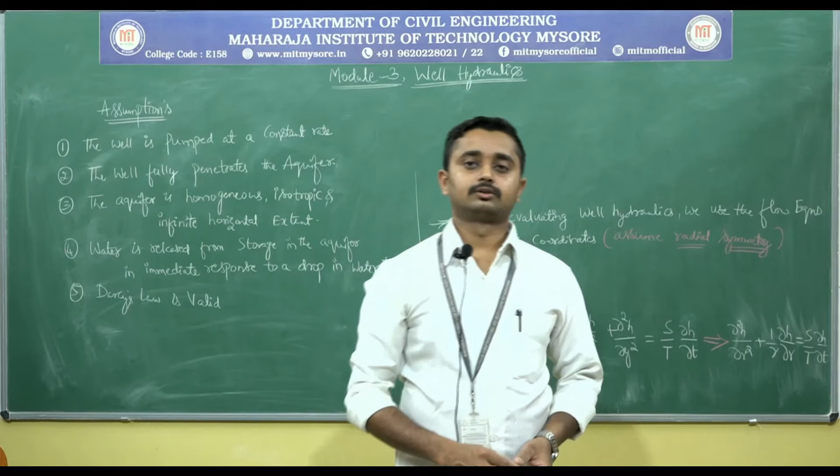Hello. Today we will start module 3, well hydraulics. Basically, well hydraulics means the study of water flowing towards the well.

If this is a well, when the pumping starts, consider this is the initial water level.

When the pumping starts, this water level reduces to this point. Also, the water level in the aquifer, meaning the water level in the vicinity of the well, both get reduced. The reduced water level forms drawdown.

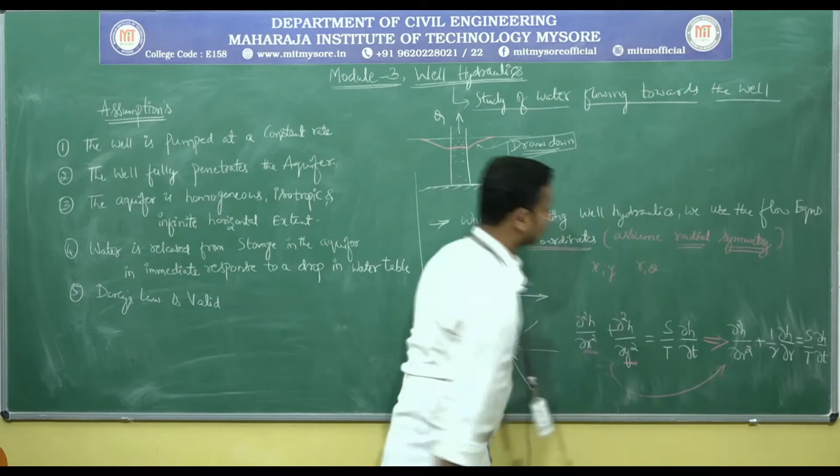Dou square h by dou x square in the x direction, dou square h by dou y square in the y direction, equals s by t, dou h by dou t. I'll explain these equations in the coming derivations. This gets converted into r, the radial direction. Simply, well hydraulics is the study of water flowing towards the well. This is all about well hydraulics.

There are some assumptions before entering into this module. This module has too many derivations, but I'll explain everything in detail, don't worry about it.

Assumption one: the well is pumped at a constant rate, not with variations. Next, the well fully penetrates the aquifer. If this is the impervious layer, the well fully penetrates, not just up to here or here.

Next, the aquifer is homogeneous, isotropic, and of infinite horizontal extent. Homogeneous and isotropic means the property here is same, the property of the soil or property of the water is same everywhere. Everything is homogeneous.

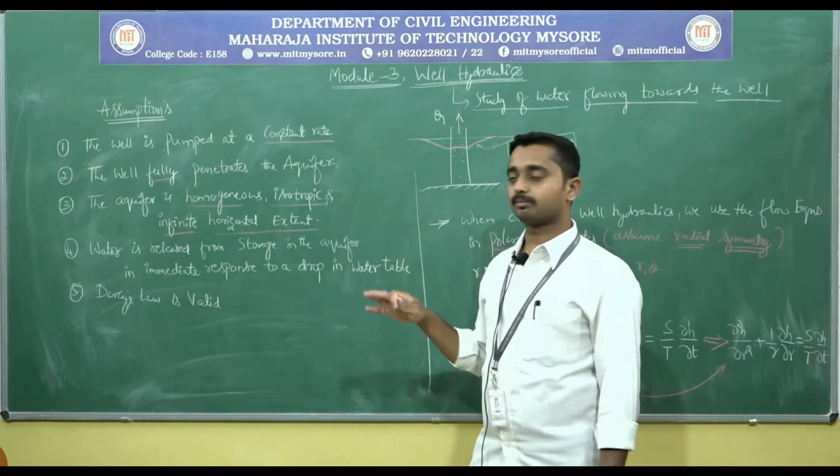Infinite horizontal area means we are not restricting to some kilometer square area, this is infinite area. So the aquifer is homogeneous, isotropic, and of infinite horizontal extent, with no restriction, and the property of water and soil is the same throughout this infinite area.

Next, water is released from storage in the aquifer with immediate response to the drop. If you start pumping, water level immediately decreases. If there is good rain or flow from another aquifer, the water level immediately rises. Once you start pumping, water level definitely immediately reduces.

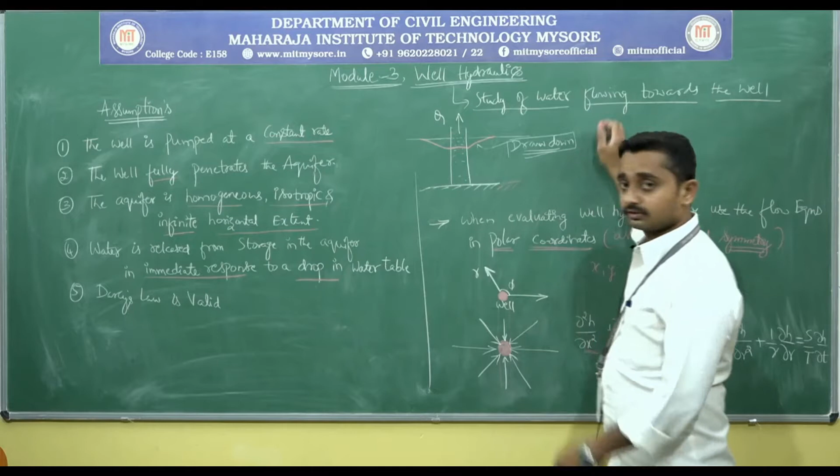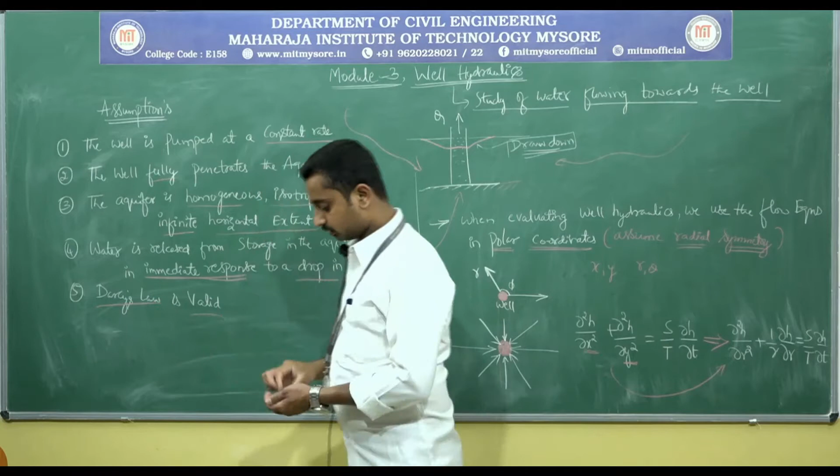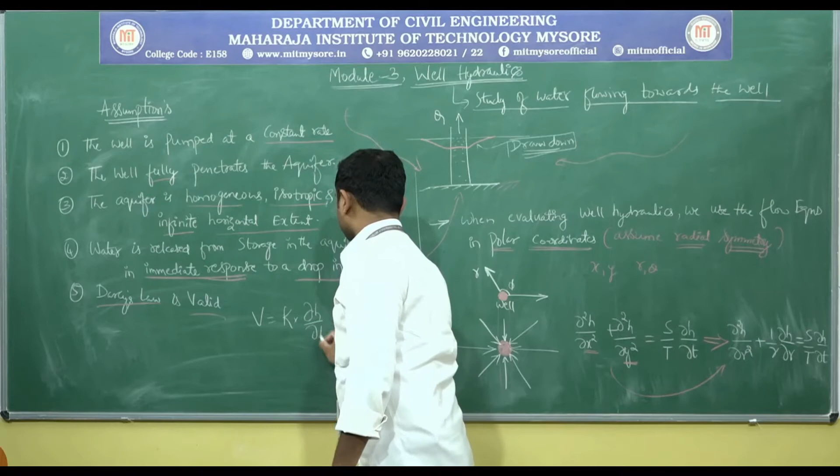If there is a good rain or a flow from another aquifer, the aquifer gets recharged and the water level rises. This is an immediate response to a drop in water table. Next, Darcy's law is valid, which you know from module 2: velocity V equals K, the permeability, into dH by dT. So Darcy's law is valid.

These are all assumptions we must keep in mind throughout this module, since this module is mainly about derivations, and in every derivation we need all these things.

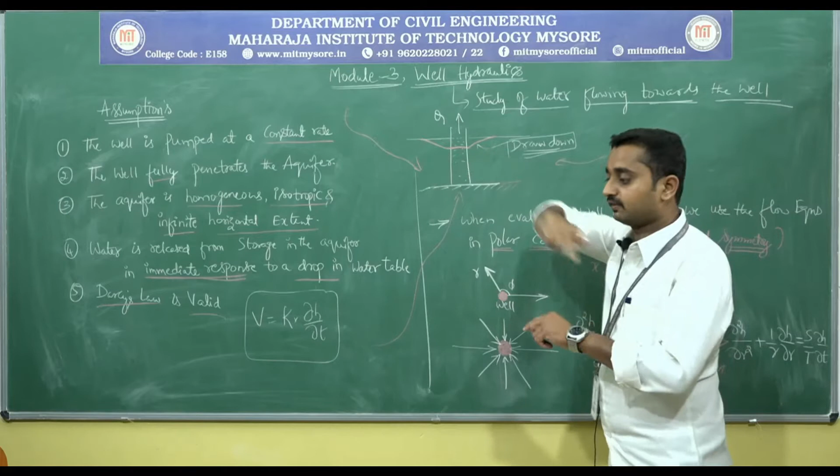Once the pumping starts, water level gets reduced, both in the well and in the vicinity surrounding the well. This reduced water level forms the cone of depression, which is nothing but drawdown.

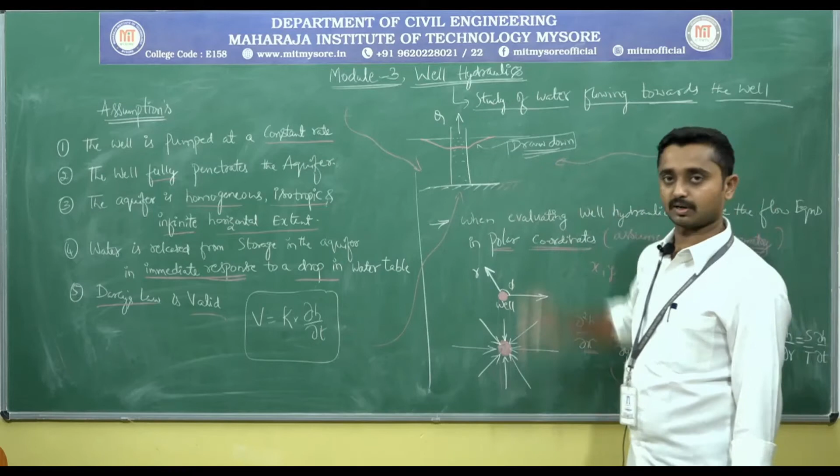In case of well hydraulics, we prefer polar coordinates because water level varies in all directions, not only in X or Y. Once you start pumping, water level varies in all directions, and once the aquifer recharges, it recharges in all directions.

This is all about the introduction part of well hydraulics.

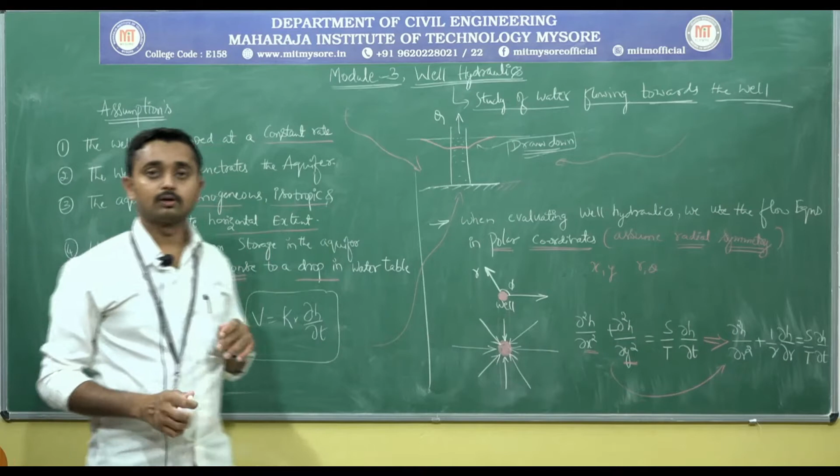Today we will derive Thiem's equation, also known as Dupuit's equation. I'll explain everything one by one. So, steady radial flow to a well in an unconfined aquifer is called Thiem's equation, and when there is no observation well, the same equation is called Dupuit's equation. I'll cover these points in this part.

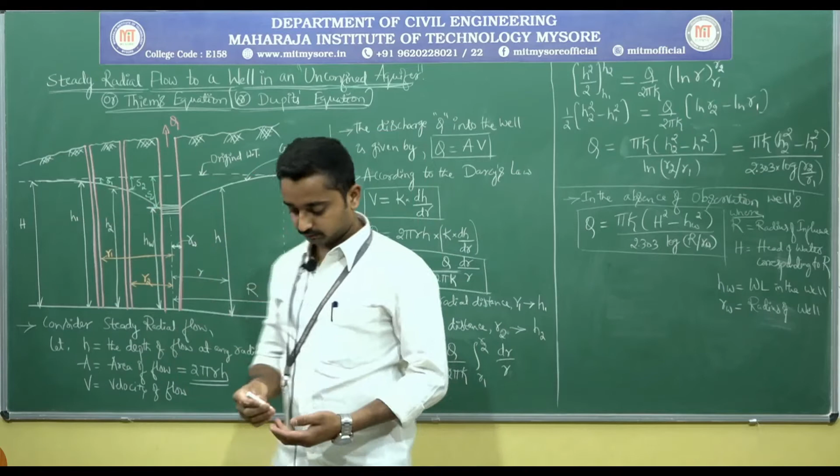Carefully observe the diagram. This is the pumping well, and these two are observation wells: observation well 1 and observation well 2. Through the pumping well we extract water, while the observation wells continuously record the data.

This is the original water table. Once pumping starts, the original water level slowly decreases, forming the cone of depression, the area of influence. Around the pumping well, within some area, the water level slowly decreases, and this is called the cone of depression.

This cone of depression shows a reduced water level: this is drawdown SW at the pumping well, S1 is the drawdown at observation well 1, and similarly drawdown at observation well 2. Drawdown is nothing but the decreased water level. This is the height from the impermeable strata to the water level, H1 for observation well 1 and H2 for observation well 2, and H is the whole head of water.

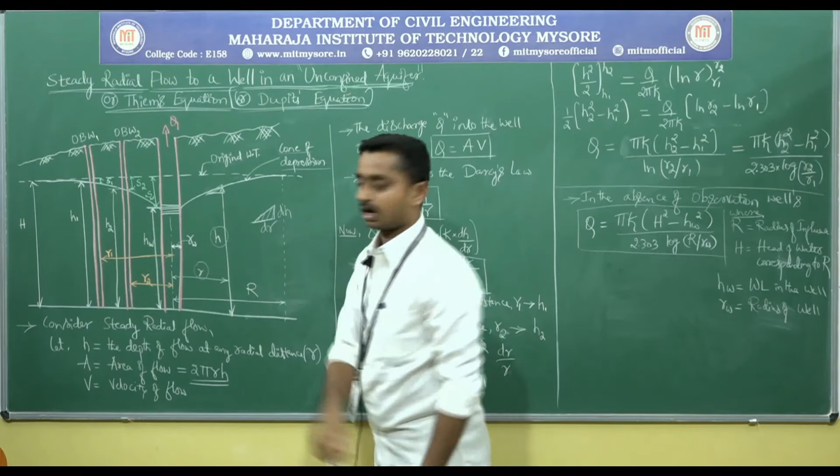H is the depth of flow at any radial distance R. A means area of flow, 2 pi RH for this pumping well, and V is velocity of the flow.

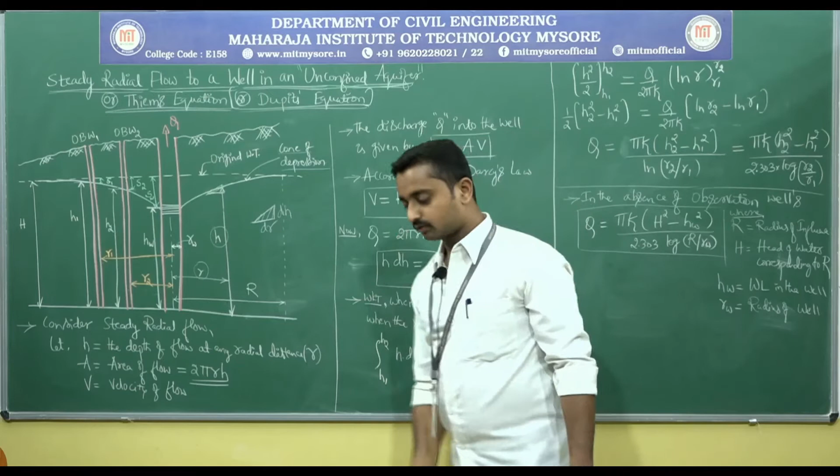Now the discharge, a very well known formula from third semester fluid mechanics. The discharge Q into the well is given by Q equals AV, the continuity equation.

According to Darcy's law, which we already know from module 1 and 2, please revise the previous concepts. Darcy's law says velocity V equals K into dH by dr, the coefficient into hydraulic gradient.

Now substitute the values into this equation. Q equals area, which is 2 pi RH, multiplied by velocity K into dH by dr. Rearranging, H into dH equals Q divided by 2 pi K, multiplied by dr by R.

When the radial distance is R1, the depth of flow is H1. See carefully in the diagram, when the radial distance is R1, the depth is H1. These are the boundary conditions.

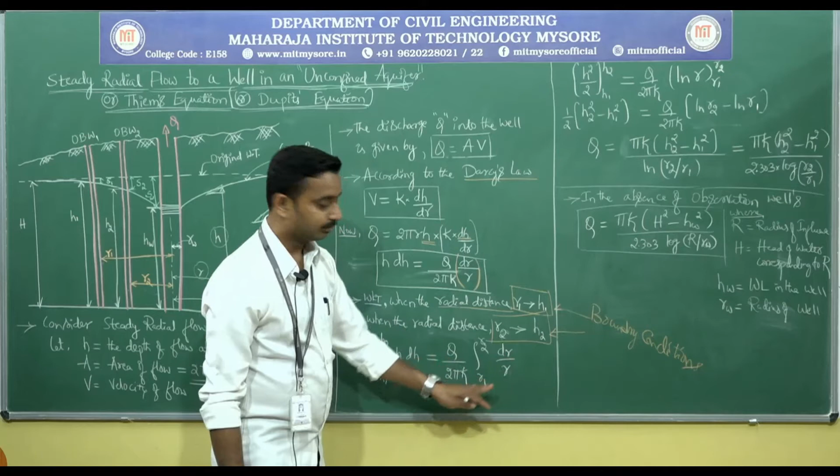Now integrate this equation: integration of h dh between the limits h1 to h2 equals Q by 2 pi K, taken outside, times the integration of dr by r between the limits r1 to r2. Integration of h into dh gives h square by 2, between the limits h1 to h2, equals Q by 2 pi K into integration of 1 by r.

Integration of 1 by r gives ln r between the limits r1 to r2. Substituting the limits: 1 by 2 taken outside, h square, so h2 square upper limit minus h1 square lower limit equals Q divided by 2 pi K into ln r2 upper limit minus ln r1.

Here the 2 gets cancelled. Forming the equation for Q: Q equals h2 square minus h1 square into pi K, divided by ln r2 minus ln r1, which in log a minus log b form becomes ln r2 by r1.

Now convert the ln to log. Pi K remains the same, h2 square minus h1 square remains the same, so ln converted into log gives multiplied by 2.303, log of r2 by r1. This is the equation for radial flow in an unconfined aquifer.

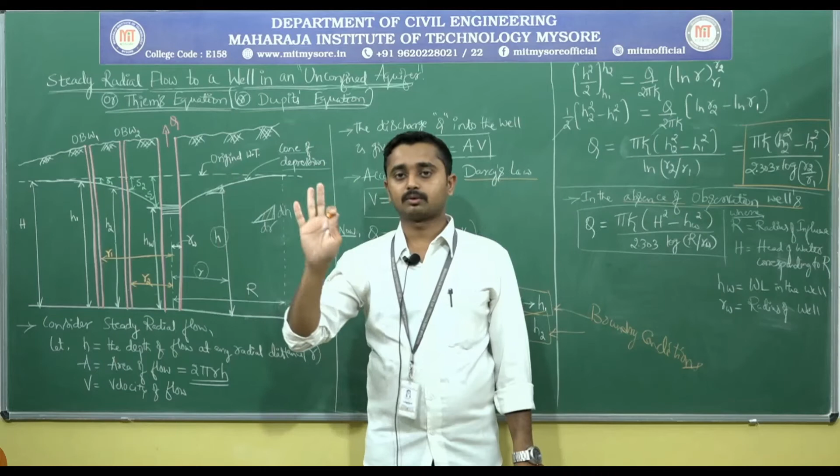Steady radial flow in an unconfined aquifer - this is the equation. If there is no observation well, just change the terminology. With only a pumping well, Q equals pi K, where h2 is replaced by H, the total head of water, and h1 is replaced by hw. This is the equation for steady radial flow in an unconfined aquifer when there is no observation well.

If there is no observation well, replace h2 by capital H and h1 by hw. Everything else stays the same, divided by 2.303 log of r2, the radius of influence, which is replaced by capital R, up to the cone of depression, divided by r1, which is replaced by rw, the radius of the pumping well. This equation is known as Dupuit's equation.

If there is an observation well, then this is Thiem's equation for steady radial flow in an unconfined aquifer. If there is no observation well, then this equation is called Dupuit's equation. R is the radius of influence, from the center of the pumping well to the end of the cone of depression.

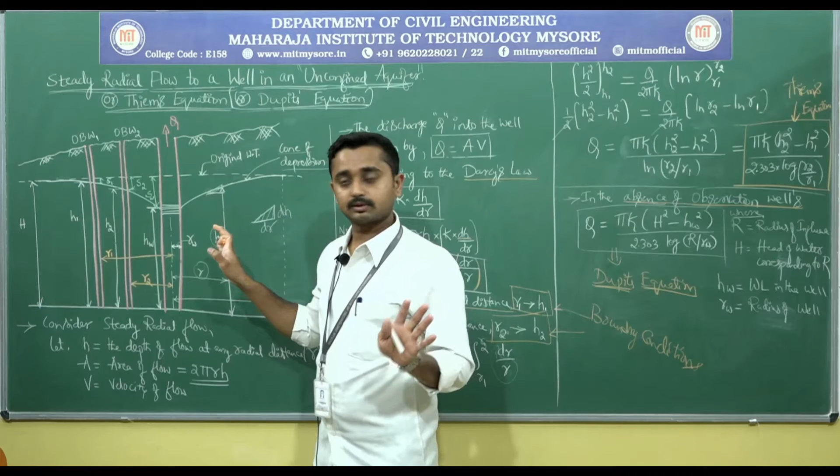H is the head of water, the full head of water. HW is the water level in the well - remember there is no observation well in this case, so HW means water level in the pumping well. RW is the radius of the well, the pumping well. This is all about steady radial flow to a well in an unconfined aquifer.

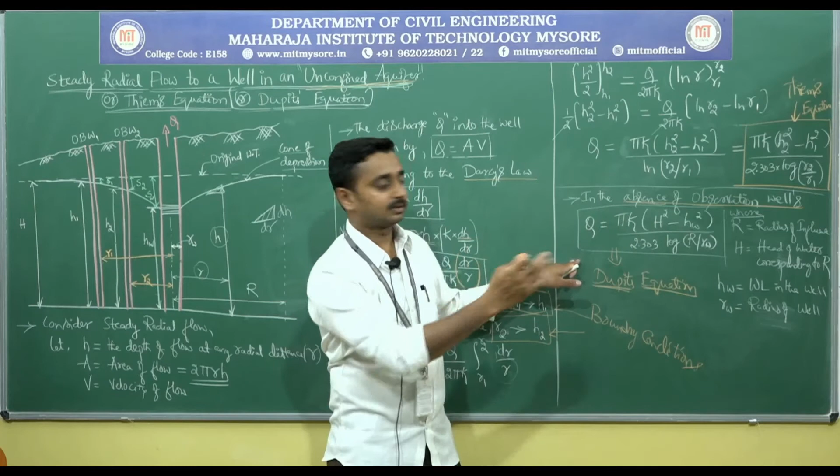This is important - for an unconfined aquifer, this is sometimes also called Thiem's equation. If there is no observation well, the same equation is replaced with different terminology, and then we call it Dupit's equation.

Next derivation: steady radial flow to a well in a confined aquifer. The previous one was steady radial flow to a well in an unconfined aquifer. Now we follow the same procedure for a confined aquifer. The previous diagram also looks like this.

Carefully observe, in case of a confined aquifer, as the name suggests, this is confined. There are two impervious layers, so this water is confined between two impervious layers. In the previous derivation, there was only one impervious layer because that was unconfined and the water level was open to atmosphere. But here the water level is confined between impervious layers. And the thickness between the two impervious layers is B.

Same setup: this is the pumping well, observation well 1 and 2, very similar to the previous one. Height of water, head of water in observation well 1 is H1, head of water in observation well 2 is H2. The radial distance from the center of the pumping well to observation well 1 is R1, and to observation well 2 is R2. Head of water in the pumping well is HW.

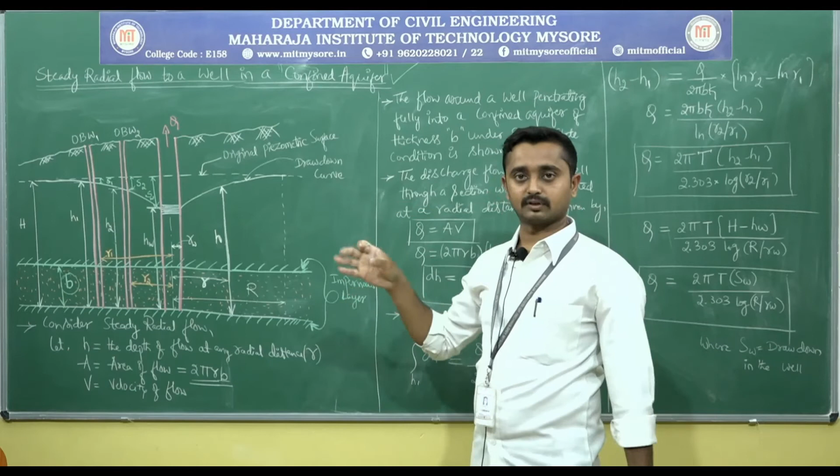Except for these two points, confinement between two impervious layers, everything else is similar to the previous derivation. In the previous derivation, the area of flow was 2 pi r h, but here it is 2 pi r b, because the thickness between the impervious layers is B. And we have the radius of influence R, radial distance R at corresponding head H.

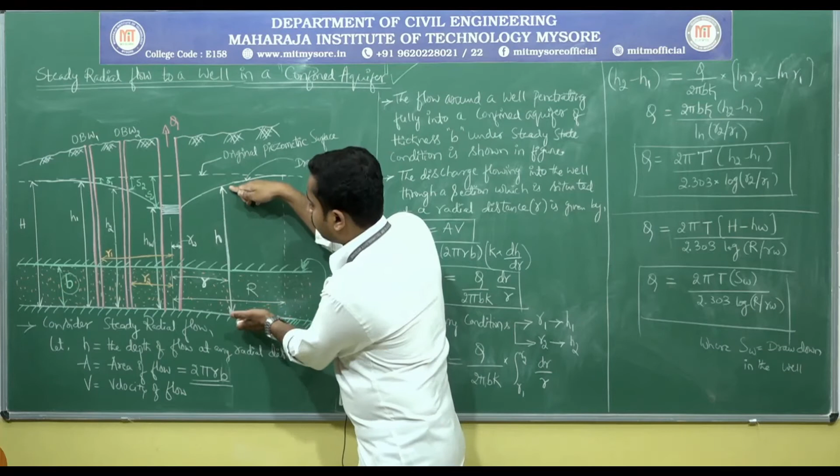Now consider the steady radial flow, very similar to the last derivation. H means the depth of flow at any radial distance R.

Area of the flow is 2 pi R B within this area, since the thickness between the impervious layers is B. V is the velocity of the flow. Very similar setup, only the area is different: in the previous derivation it was 2 pi R H, now it is 2 pi R B.

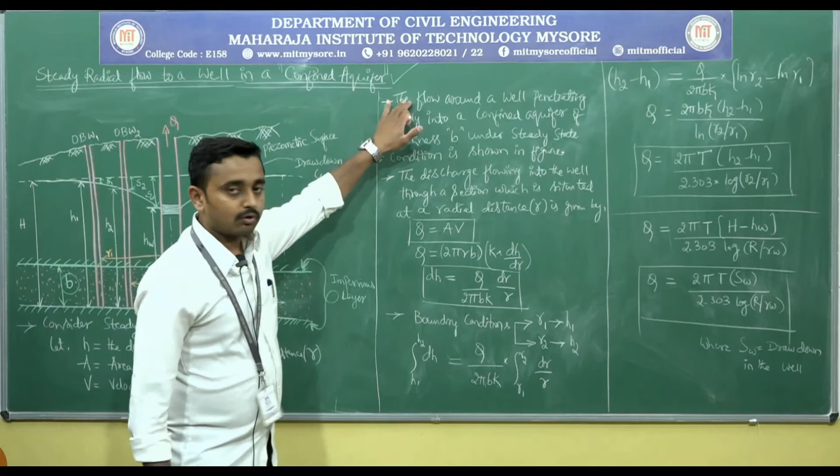The flow around a well penetrating fully into the confined aquifer. Here the flow is around a well penetrating fully into the confined aquifer of thickness B. This thickness is B.

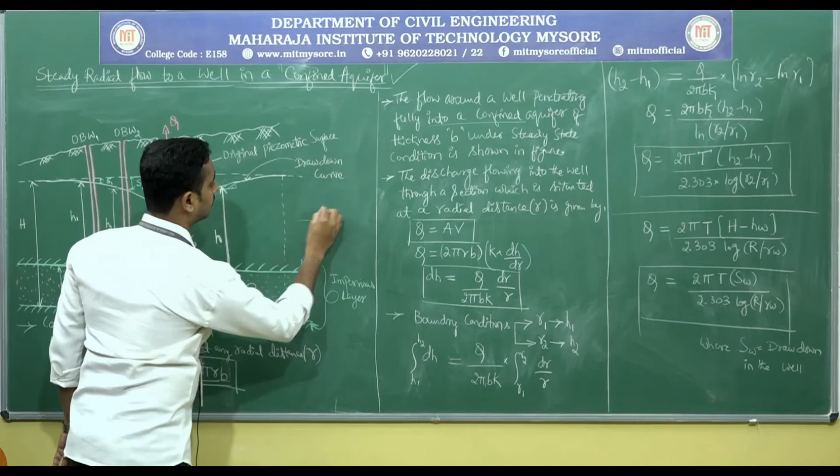Under steady state flow, as shown in the figure, now consider the discharge flowing into the well through a small section. Consider a small section of radial distance dr and height dh. This discharge flows into the well through a section situated at a radial distance r.

This is given by Q equals A V. We know A is 2 pi R B, and velocity according to Darcy's law is K into dH by dr. Now substitute the values: area 2 pi R B into velocity, which follows Darcy's equation, very similar to the previous one, K into dH by dr.

Now rearrange the terms: dH equals Q divided by 2 pi b k, into dr by r. Just rearranging the terms.

We know the boundary conditions: at a radial distance r1, the depth of flow is h1. Similarly, for the second boundary condition, at radial distance r2, the depth of flow is h2.

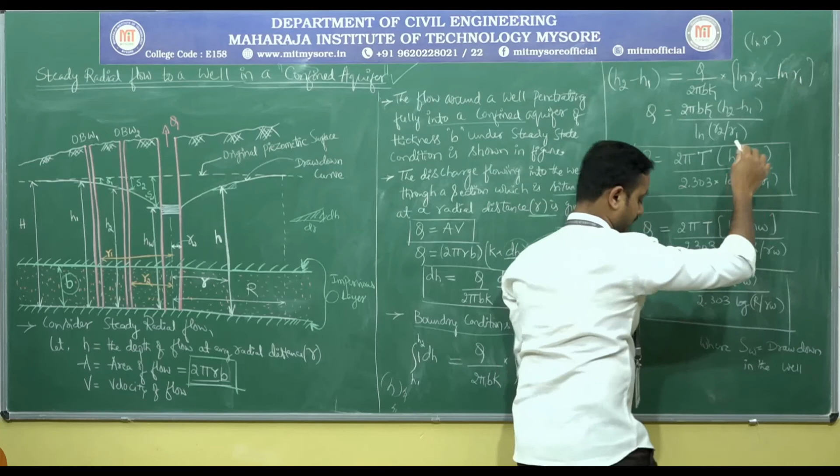Integration of 1 by r dr, very similar to the previous one, and this is simple integration we must know. Integration of 1 by r dr is ln r, between limits r1 to r2. Upper limit minus lower limit gives ln r2 minus ln r1. Now rearrange the terms: Q equals 2 pi bk into h2 minus h1, divided by ln r2 minus ln r1.

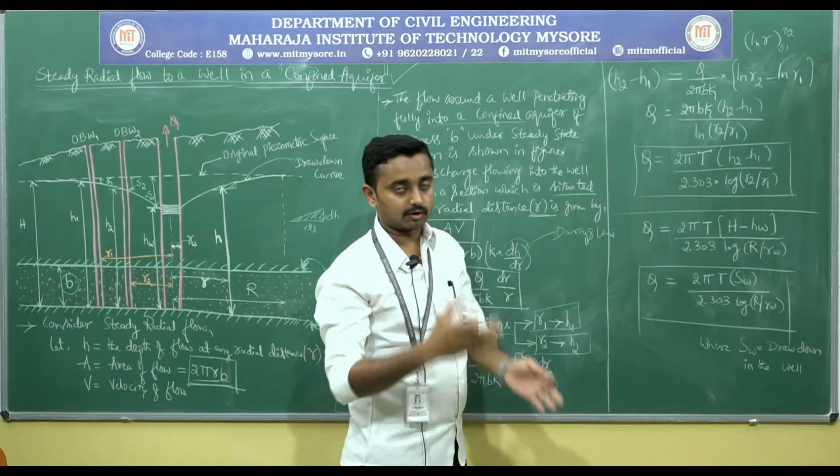Log a minus log b is nothing but log a by b, so simplify this term to ln r2 by r1. Now Q equals, and we know b into k is nothing but transmissivity, correct? B into k, T, transmissivity T.

Just replace b into k by T: 2 pi T, H2 minus H1, divided by ln, convert that into log, 2.303 into log of R2 by R1. This is steady radial flow to a well in case of confined aquifer.

Simply we can call this Thiem's equation for confined aquifer. Don't get confused, the previous derivation we also called Thiem's equation, but that was Thiem's equation for unconfined aquifer. This one is Thiem's equation for confined aquifer. Don't get confused, we can say it in that fashion also.

The previous one is steady radial flow for unconfined aquifer, nothing but Thiem's equation for unconfined aquifer. This one is steady radial flow in a confined aquifer, nothing but Thiem's equation for confined aquifer.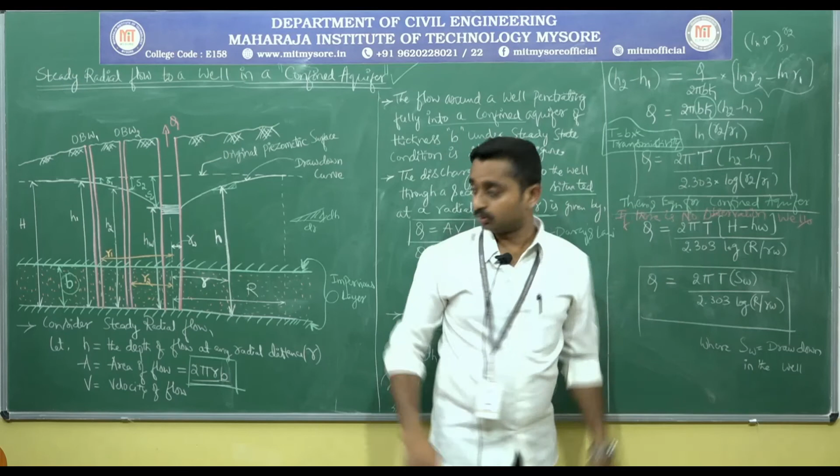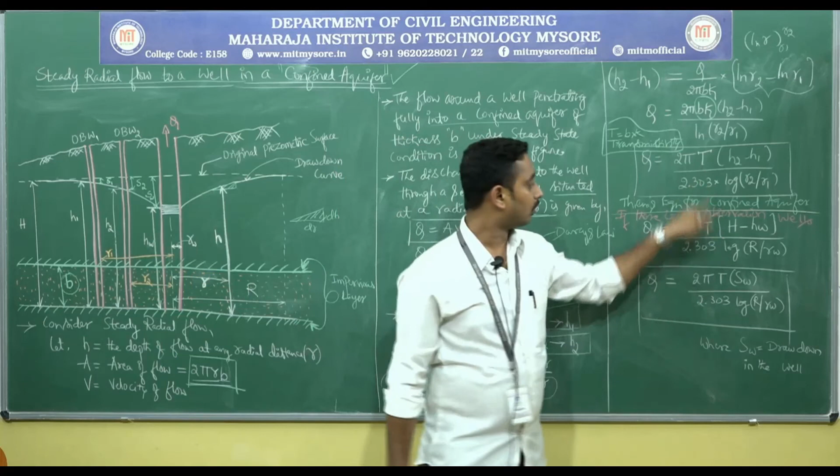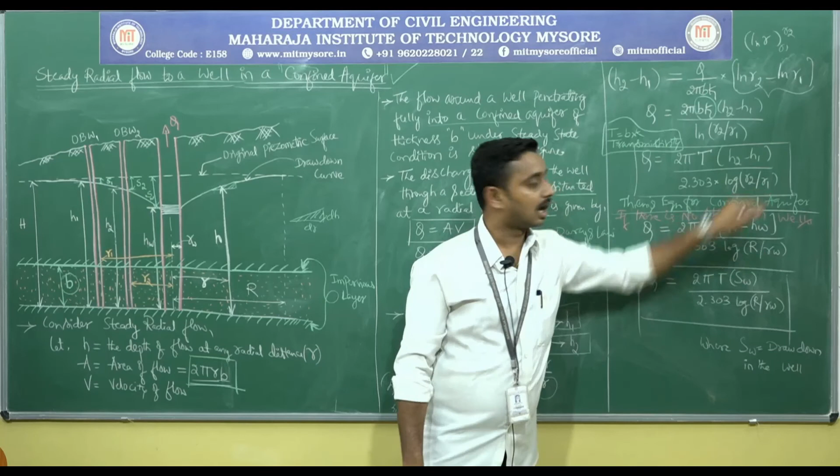2 pi T as it is. H2 minus H1, H2 is replaced by H, total head, and H1 is replaced by HW, whole divided by 2.303 log of R2. Radius of influence is replaced by capital R, radius of influence, and R1 is replaced by R1, meaning this radial distance. Since there is no observation well, it's simply replaced by RW, radius of well.

Now 2 pi T as it is, H minus HW is replaced by this term, H minus HW is replaced by SW, drawdown. Listen, H minus HW is nothing but drawdown SW, correct? This is H, from here to here it is H. H minus HW gives SW, drawdown. So this term is replaced by SW divided by the same thing, 2.303 log of R by RW.

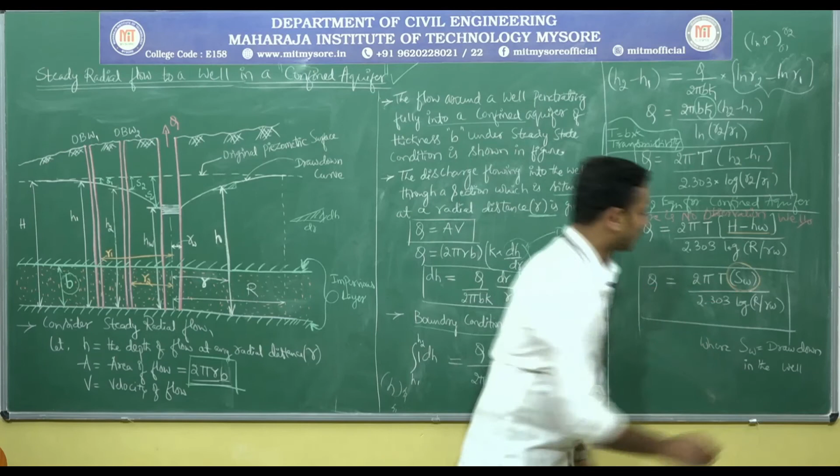This means SW is nothing but drawdown in the well. This is the Thiem's equation for confined aquifer, modified. In case there is no observation well, this is the final result, and again we can call this Dupuit's equation. The concept is almost similar for unconfined aquifer and confined aquifer.

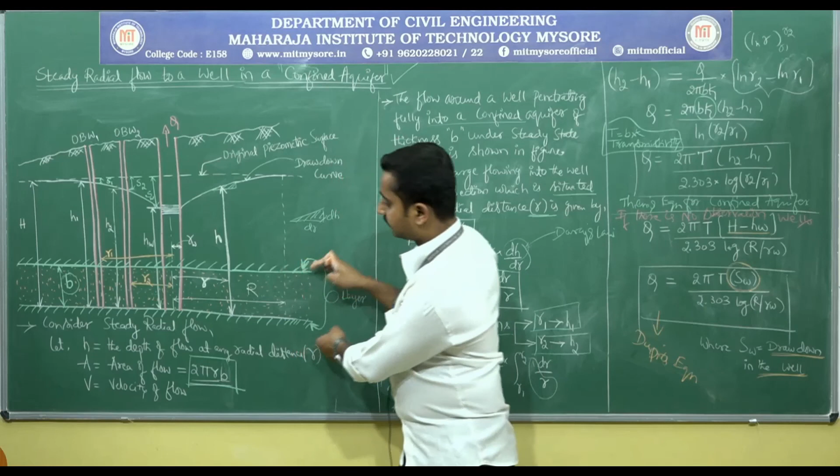Here the water is confined between two impervious layers and the area is 2 pi rb. In unconfined aquifer that area is 2 pi rh. Here it's 2 pi rb. Everything is very similar, don't get confused.

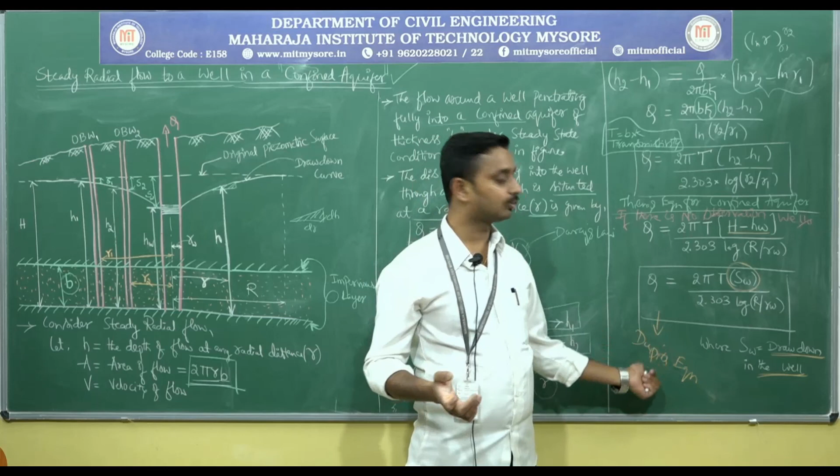So up to here this is steady radial flow for confined aquifer, nothing but Thiem's equation for confined aquifer. If the terminologies are modified, when there is no observation well, the same equation becomes this, Dupuit's equation. If there is no observation well, that becomes Dupuit's equation. If there is an observation well, that becomes Thiem's equation.